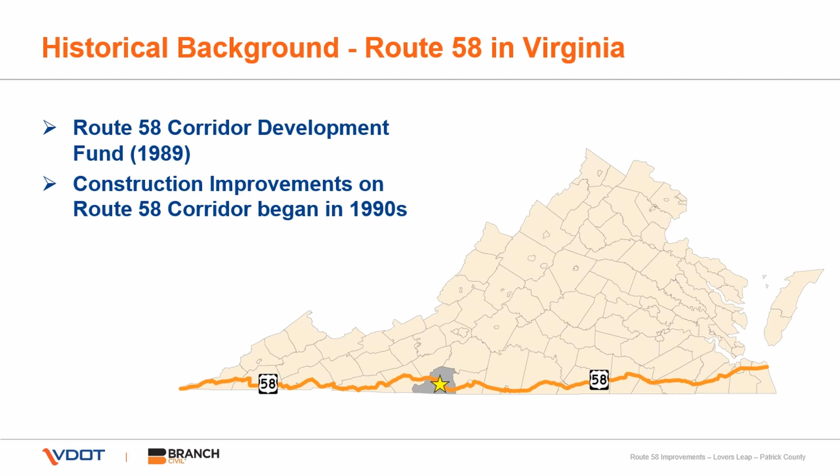For the Lover's Leap section of Route 58, project design was initiated in 1998. Right-of-way acquisition to construct the project commenced in 2000, and approximately two-thirds of the necessary right-of-way and easements were acquired at that time. The Commonwealth of Virginia codified the 1995 Public-Private Transportation Act, or PPTA, that authorized VDOT to procure

contracts with private entities to develop transportation facilities when it is more timely, more efficient, or less costly. In 2003, a PPTA agreement was executed between VDOT and Branch Civil Incorporated to expedite the delivery of planned improvements along Route 58. Several Route 58 improvement projects in VDOT's Salem district have been completed under this program and will be shown on the next slide.

In the mid-2000s, the Route 58 Corridor Improvement Program experienced funding limitations. As a result, project development on several Route 58 projects was halted. In 2013, the Virginia General Assembly prioritized the Route 58 Lover's Leap segment as the next section to be constructed. The Lover's Leap project will widen 7.4 miles of Route 58 from 2 lanes to 4 lanes over Lover's Leap, including the area where the existing overlook is located.

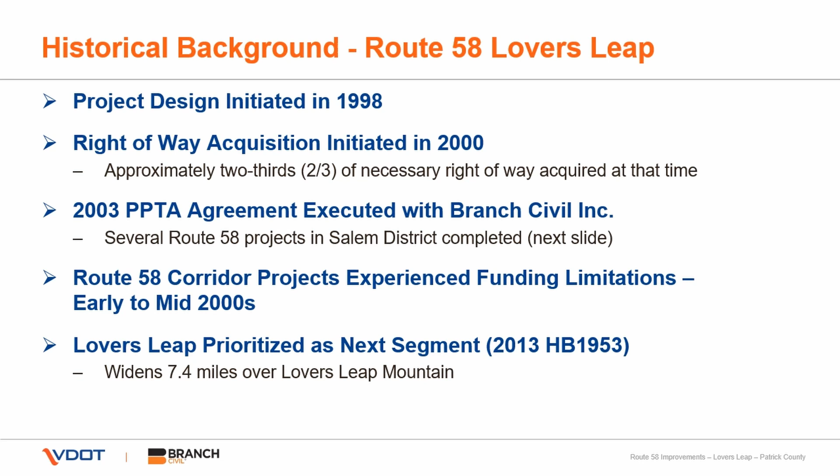As mentioned on the previous slide, several Route 58 improvement projects in VDOT's Salem district were completed under the PPTA agreement with Branch Civil. The Route 58 segment in Meadows of Dan was completed in May 2006. The Hillsville Bypass was completed in August 2011, and the Tri-County and Laurel Fork segment of Route 58 was completed in October 2016.

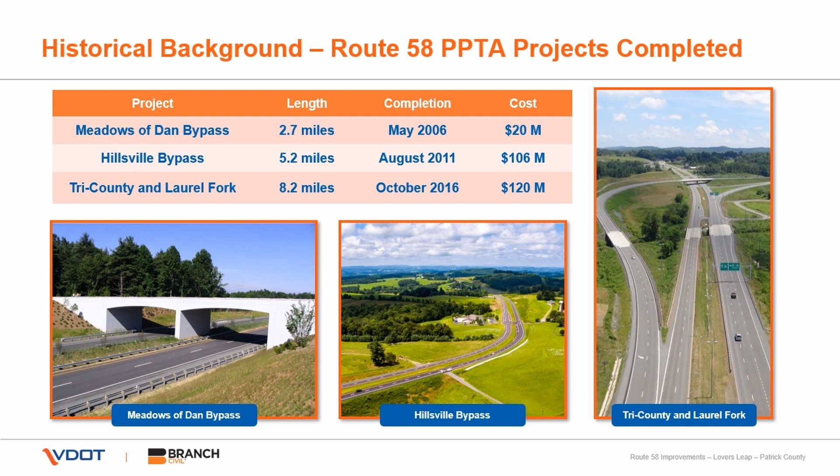We will now transition from the historical background of the Route 58 corridor improvements to the specific Route 58 Lover's Leap project that is the focus of this Pardon Our Dust meeting.

Referring to the graphic on the right, the Route 58 Lover's Leap project begins approximately 1/4 mile west of the Poor Farmer's Farm store in Vesta. The project continues eastward, over and down Lover's Leap Mountain, ending at the existing 4-lane section of the Route 58 Stuart Bypass. The design-build contract for this project is $300 million.

Acquisition of remaining right-of-way to construct the project is currently underway. All affected property owners for the remaining right-of-way have been contacted. Actual construction activities within existing right-of-way will begin in fall 2021, and construction is slated to be complete in late spring 2026.

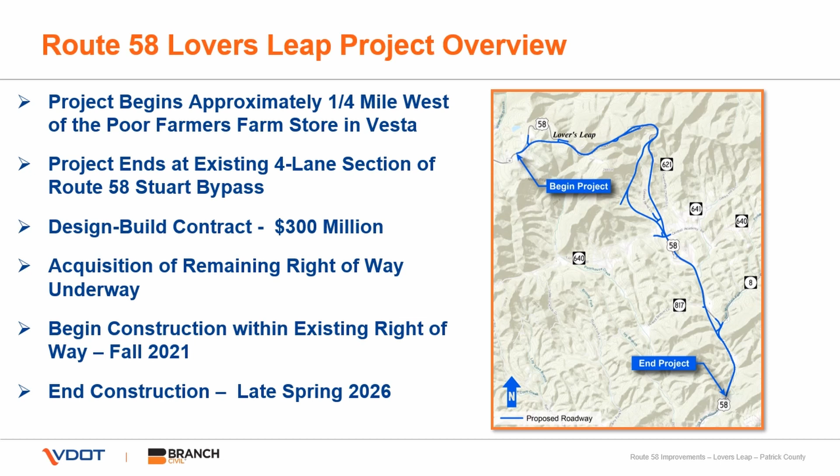As mentioned previously, the primary purpose of this project is to enhance economic growth potential and to provide an adequate, modern, safe, and efficient highway system along Virginia's southern boundary.

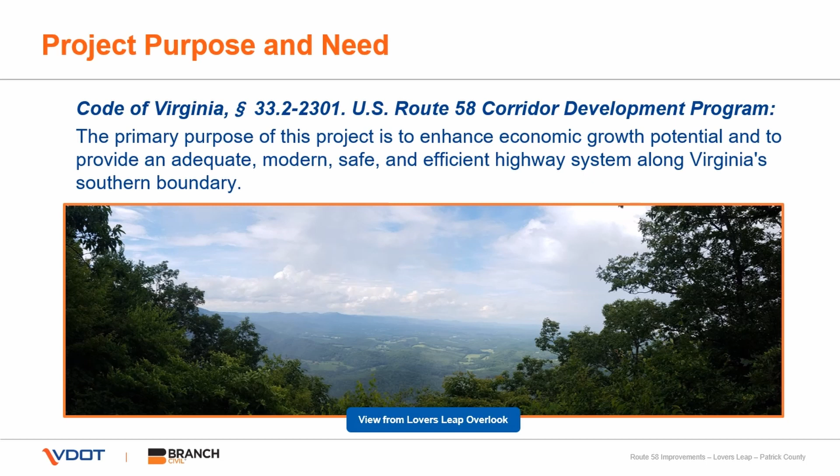Improvements to this 7.4-mile section of Route 58 Lover's Leap include the following: widening to 4 lanes, improving alignments and grades, widening shoulders, improving secondary road connections and private entrances, which will provide greater intersection sight distance, improving the Route 8 intersection, adding turn lanes at all secondary road connections and crossovers, providing a truck brake check area, providing truck escape ramps, and enhancing the existing Lover's Leap overlook, which we will consider more closely on the next slide.

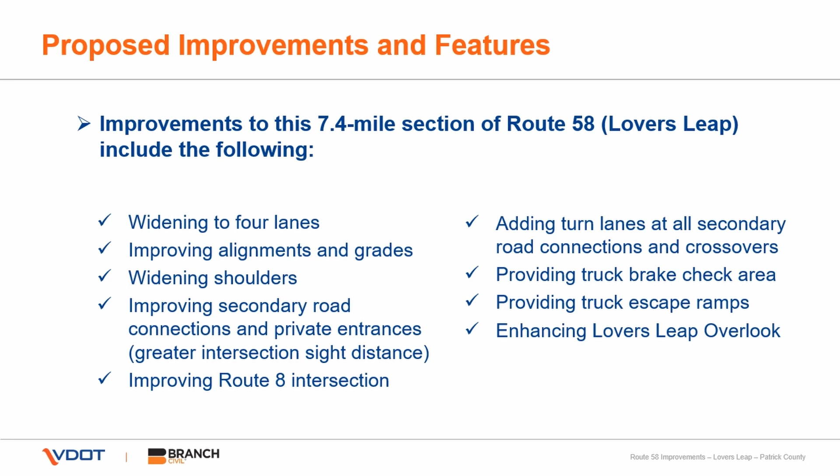The project includes enhancements to the Lover's Leap overlook area. These enhancements include better designation of the area, a safer access to the overlook area, and a greater number of parking spaces.

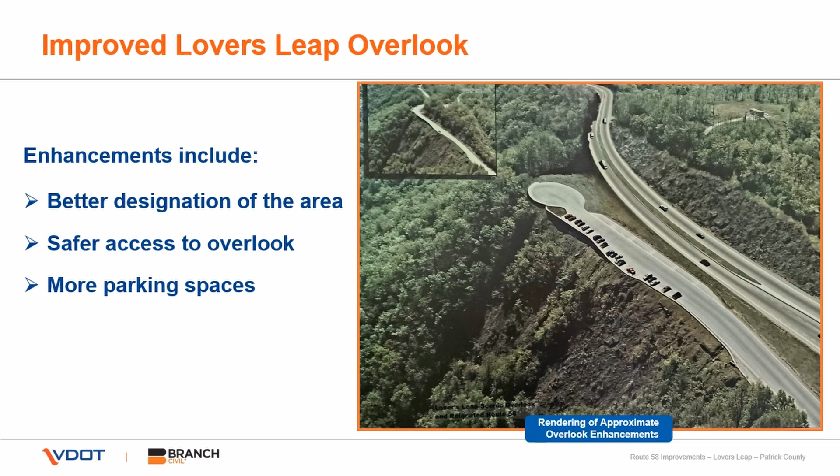This project is being delivered using the design-build approach. This means that project design and construction are being accomplished by a single team. The design-build method allows construction to proceed while design is being refined. The ultimate benefit of the design-build process is that it helps to get the job done faster since funding is now available.

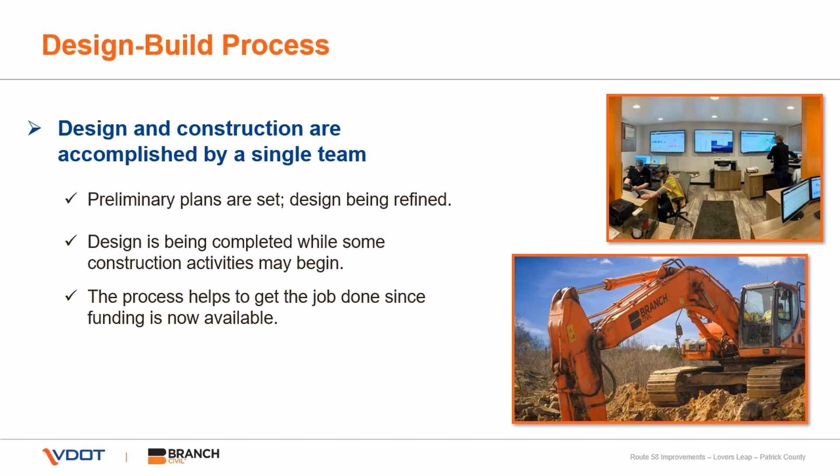To better understand the nature of the Route 58 Lover's Leap project and the types of roadway improvements that people can expect along this 7.4-mile section of Route 58, the project can be divided into 3 distinct segments. These are shown on the graphic to the right. The project begins with the western segment, shown in green, a central segment, shown in orange, and an eastern segment,

shown in dark blue. Once construction begins this fall, construction activities will likely be underway in all 3 segments from fall 2021 through project completion in spring 2026. Next, we will take a closer look at each segment and review the type of improvements planned for each.

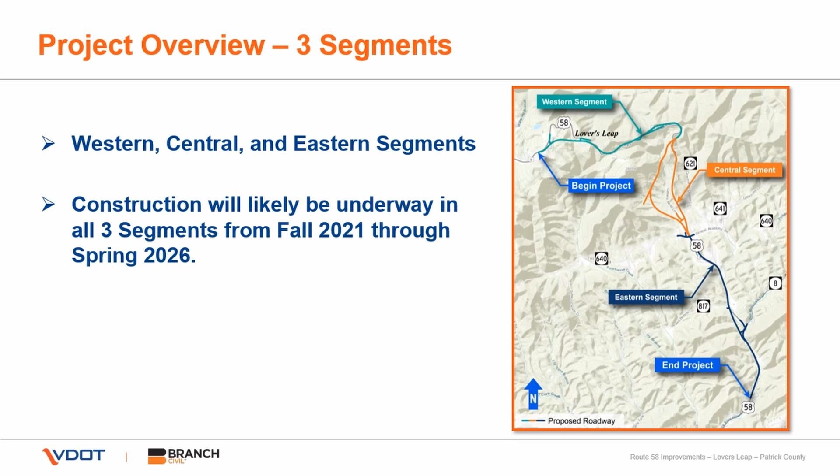The western segment of the Route 58 Lover's Leap improvements will include 2 different typical sections. The first typical section is shown on this graphic.

It begins approximately 1/4 mile west of the Poor Farmer's Farm store in Vesta and continues to approximately 3/4 mile east of the Lover's Leap overlook. This typical section will provide for 2 lanes of traffic in both the westbound and eastbound directions with a raised grass median. The 18-foot median will enhance safety by separating eastbound and westbound traffic.

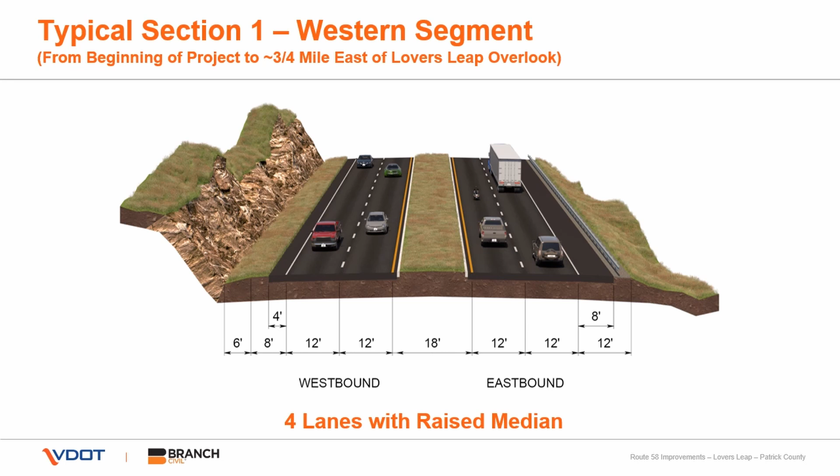The second typical section for the western segment is shown on this graphic. It begins at the end of the previous typical section, or approximately 3/4 mile east of the Lover's Leap overlook, and extends eastward to approximately 1/4 mile east of the entrance to DeHart Botanical Gardens.

This typical section will provide for 2 lanes of traffic in both the westbound and eastbound directions with an 18-foot paved median with a protective concrete barrier in the center. The 18-foot median in this area will similarly enhance safety by separating eastbound and westbound traffic.

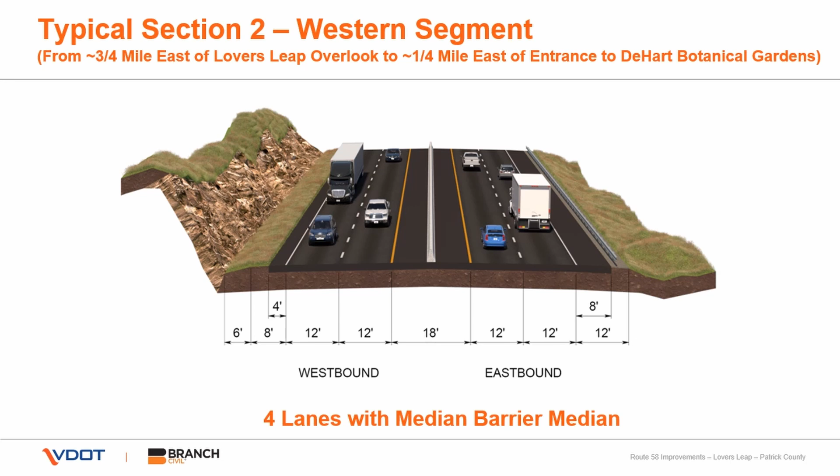The typical section for the central segment of the project is shown on this slide. The central segment begins approximately 1/4 mile east of DeHart Botanical Gardens and extends eastward to the bottom of Lover's Leap Mountain at the Route 640 intersection. It is unique in that it involves a wide physical separation of the eastbound and westbound lanes.

On the left of this graphic, the existing 2 lanes of Route 58 will become the 2 westbound lanes of Route 58. On the right side of this graphic, 2 new eastbound lanes will be constructed with a significant horizontal separation from the westbound lanes. These 2 new eastbound lanes will descend Lover's Leap Mountain to the west of Greasy Bend Lane and will provide gentler downhill grades.

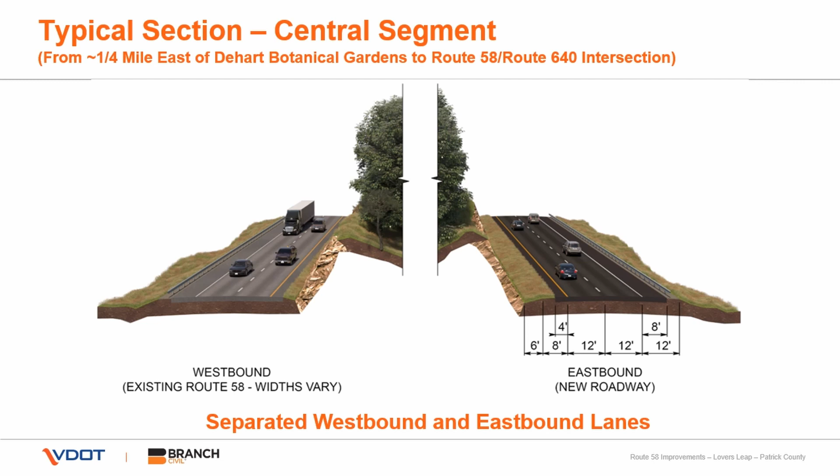The typical section for the eastern segment is shown on this graphic. It begins at the end of the previous typical section, or at the Route 640 intersection, and extends to the end of the project, tying into the existing Stuart bypass.

This typical section has 2 lanes of traffic in both the westbound and eastbound directions and includes a 4-foot paved median that will connect to the existing Stuart bypass.

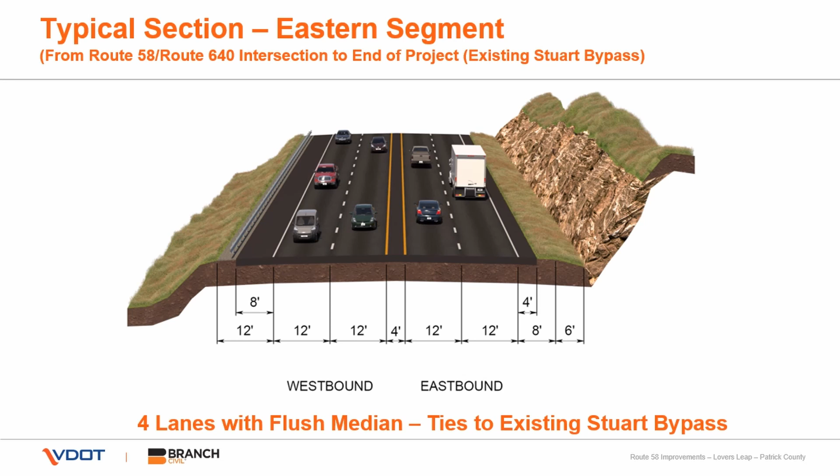We will now review several aspects of construction that people will notice on and near the Route 58 Lover's Leap project. The first of these is noise impacts.

Rock drilling, blasting, and other aspects of the project will cause temporary noisy periods during daytime hours. When drilling and/or blasting is necessary, both directions of Route 58 may be blocked for approximately 15 to 20 minutes at a time. Drivers should expect loud noises and allow extra travel time. Advance message boards will be used to inform and alert drivers.

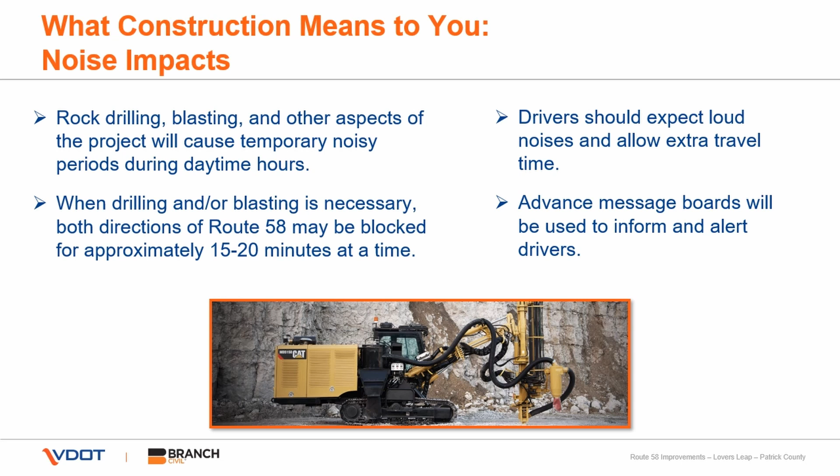Periodic lane closures during work hours can affect travel on Route 58. Typical work hours are expected to be Monday through Saturday during daylight hours. Occasional night work is possible. Route 58 may be reduced to 1 lane of traffic at times during construction. Flaggers and/or temporary signals may be used to control traffic. Drivers can expect periodic delays of approximately 5 to 15 minutes.

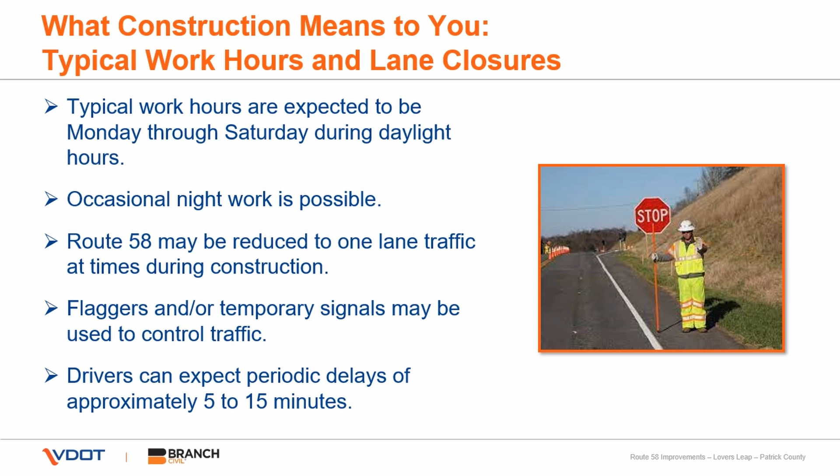Should they be necessary, temporary signals may be used during construction if Route 58 is reduced to 1 lane for extended periods of time. 1 lane will remain open with traffic in each direction alternating. Drivers should expect possible delays.

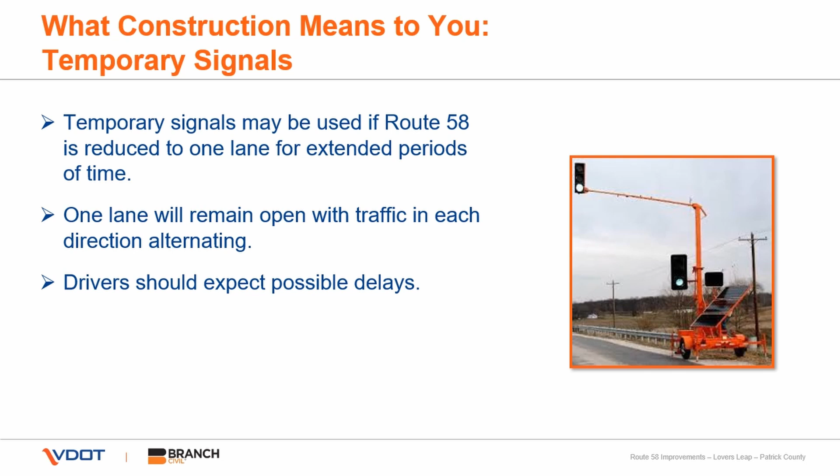Another aspect of project construction that can affect daily travel is work zone speed limit reductions. The speed limit is anticipated to be reduced to 45 miles per hour. Message boards will be used at both ends of the project to communicate upcoming traffic changes. Drivers should expect delays due to the lengths of 1-lane work zones.

Emergency conditions could arise that necessitate the total closure of Route 58 within the project limits. Therefore, an off-site detour has been identified and will only be used in the event of an unforeseen emergency.

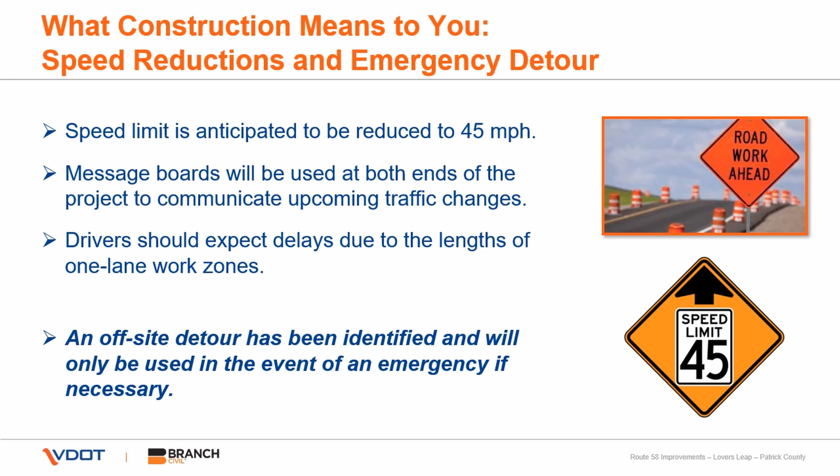If an emergency event requires a total closure of Route 58, local, non-commercial traffic can still use secondary roads around the closure. However, a detour route has been developed primarily for rerouting commercial vehicles, as many roads that could serve as alternative routes are not suitable for trucks and larger vehicles. This detour plan will only be used in the event of an unanticipated emergency.

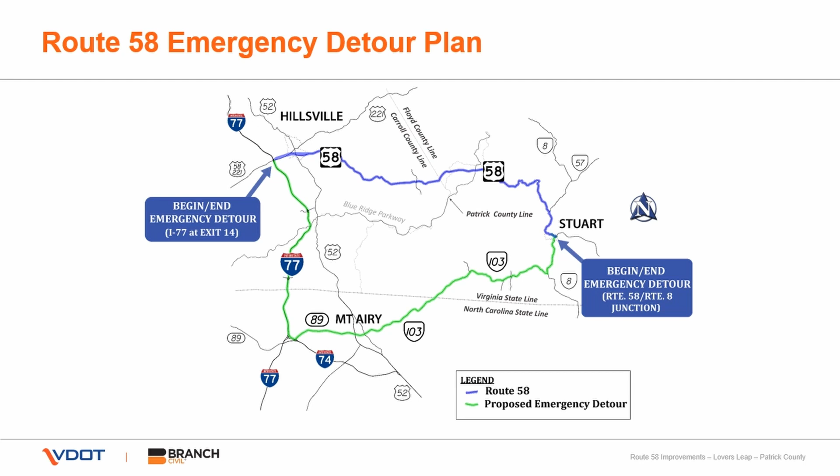Once construction begins this fall, you can stay informed with project and traffic updates in one of several ways. Visit the project website at www.virginiadot.org, Route 58 Lovers Leap, watch for message boards on the project, use the VDOT 511 mobile app, or dial 511.